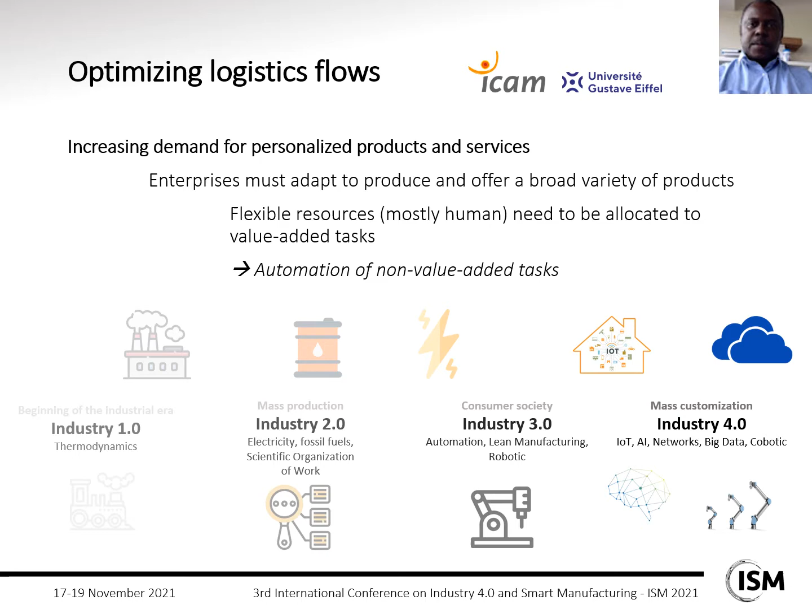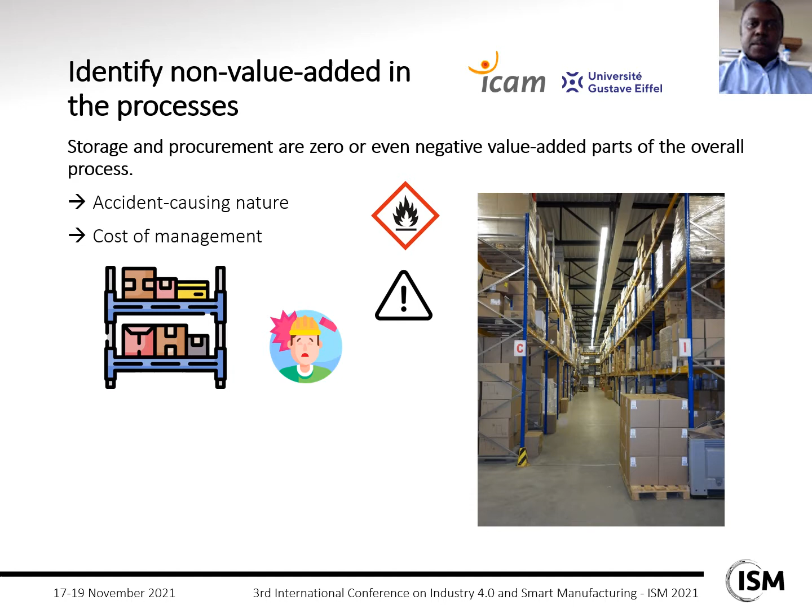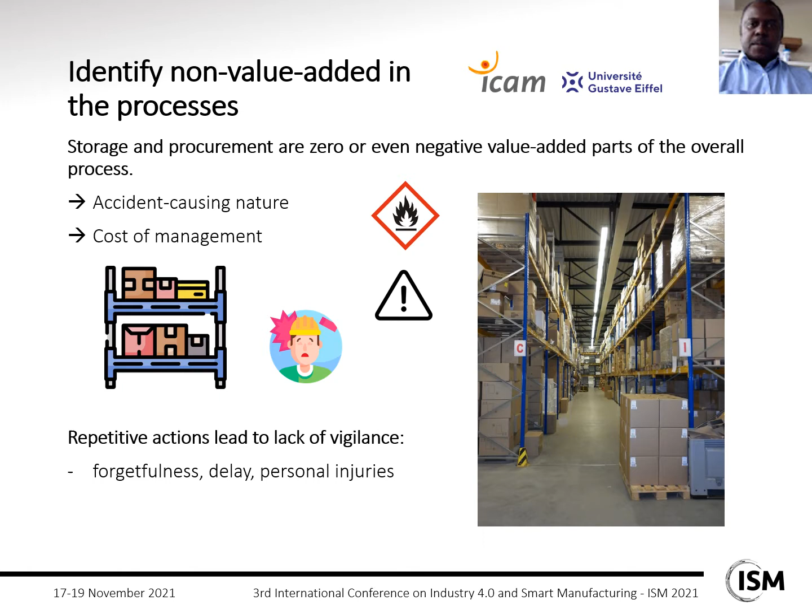First thing to notice is that storage and procurement are zero or even negative value-added parts of the overall manufacturing process. Because of its accident-causing nature, it often ends up with human accidents or losses that result in extra cost management and delays. Indeed, repetitive actions for operators in stock management processes lead to lack of vigilance, ultimately causing lots of waste that can be avoided.

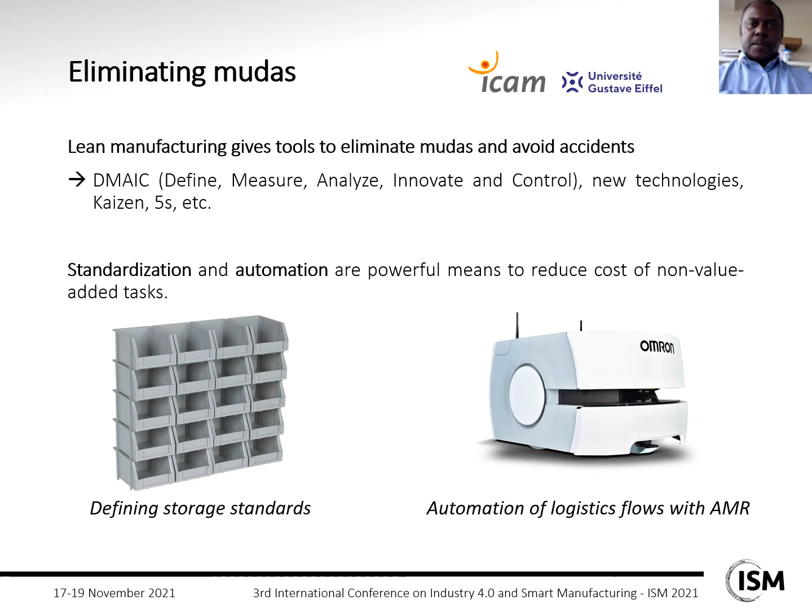Lean manufacturing thus gives us tools to eliminate those wastes and avoid accidents. For example, DMAIC, 5S or Plan-Do-Check-Act contribute to continuous improvement together with the implementation of new technologies. In particular, standardization and automation are powerful means to reduce the cost of non-value-added tasks through the definition of storage standards and the use of AMR for logistic flows.

This is, however, where SMEs usually meet brakes for the implementation of new technologies with smart manufacturing and Industry 4.0 concepts, considering the investments and the integration process within the organization.

This is why we developed a framework for optimizing industrial performance of SMEs based on lean manufacturing and GRAI methodology developed by the University of Bordeaux, together with DMAIC and design of experiments.

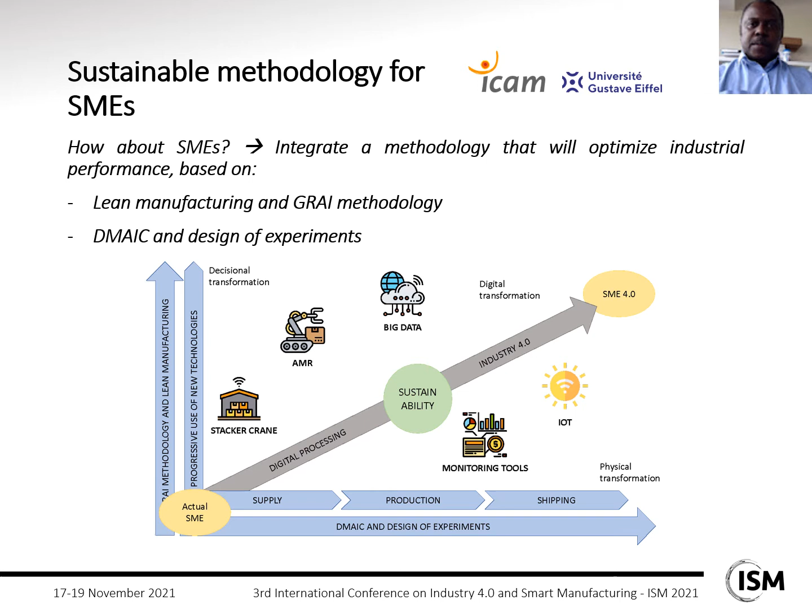The support strategy that we suggest consists of three steps. First, the evaluation of the current state of the company, then the definition of its desired future state, and finally the improvement of an ideal model of sustainability with feedback on the implementation of use cases in the company.

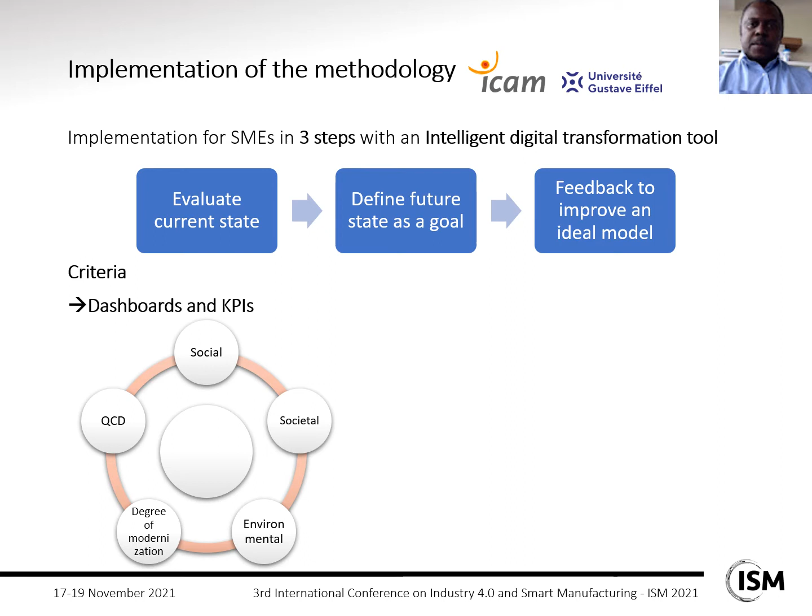Note that all the evaluation and definition is done in accordance with key performance indicators derived from quality, cost, delay, social, societal, environmental, and degree of modernization criteria.

In the end, the main hypothesis that we test with this framework is that placing humans at the center of implementation of Industry 4.0 concepts and smart manufacturing methods will increase industrial performance of SMEs.

For example, automating logistic flows with AMR and artificial intelligence within the workshop, while reducing stocks between workstations with an internal just-in-time strategy, also offers the opportunity for operators to work on really productive tasks and potentially reduce health risks as well.

On another level, IoT and big data can help optimize energy consumption of the company through predictive maintenance use cases. And also, augmented reality tools can be developed to assist operators in maintenance or stock management applications in order to reduce cognitive fatigue, while certifying quality of the processes and thus avoiding breakdowns and other wastes.

In this paper, we focused on the automation of non-value-added tasks related to storage, to test acceptability of new technologies such as AMR, with this framework among operators through use cases with an electronic card production company.

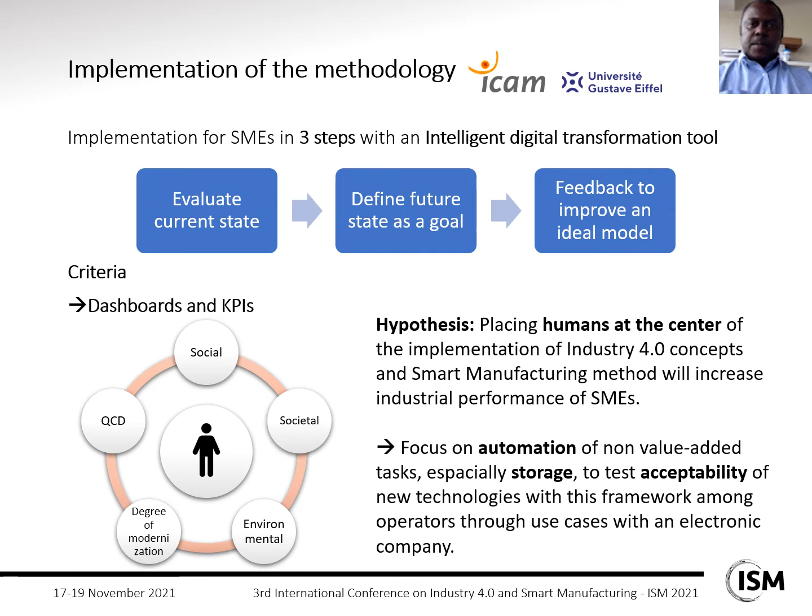Here in particular, the acceptability is supported by the development of a user-friendly human-machine interface for the MES. This aims to simplify management of logistic flows for operators with optimization and decision support modules based on artificial intelligence.

For instance, expert systems can be used to detect points to improve in a process. Machine learning and deep learning can then be used to predict future flows and need of procurement from big data.

In the end, the application should provide compiled data with relevant key performance indicators, so that users can allocate cognitive resources to really critical decisions.

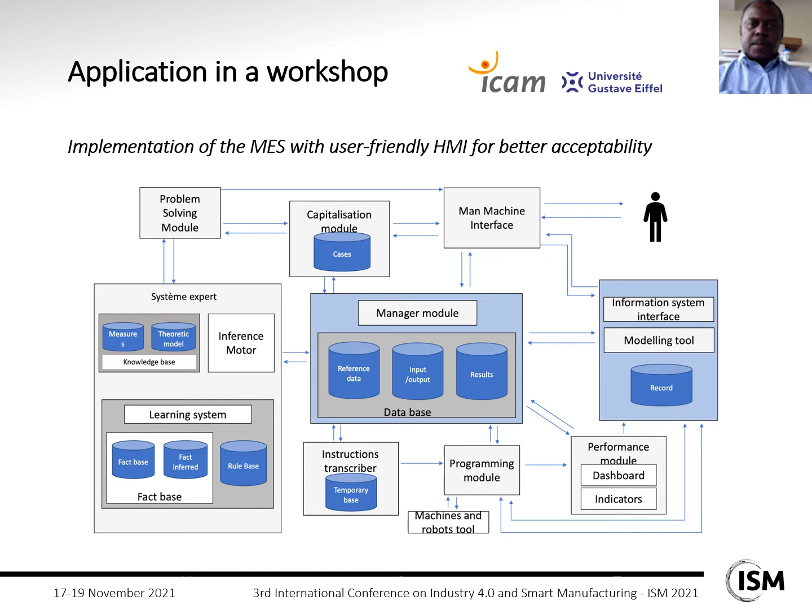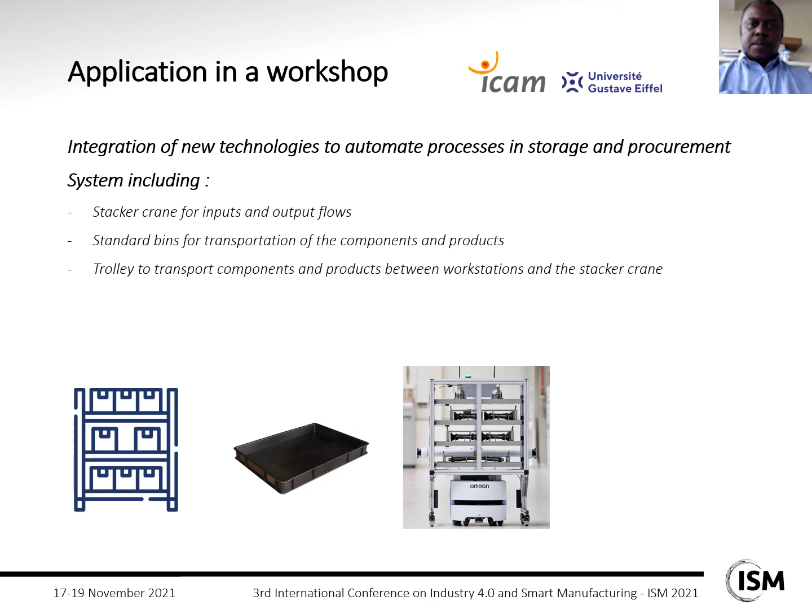In our case, the use case extends to the development of a stacker crane for input and output flows, standard bins for transportation of components and products, a trolley to transport components and products between workstations and the stacker crane, and finally an AMR fleet to transport the trolley and manage fabrication orders according to the MES directives.

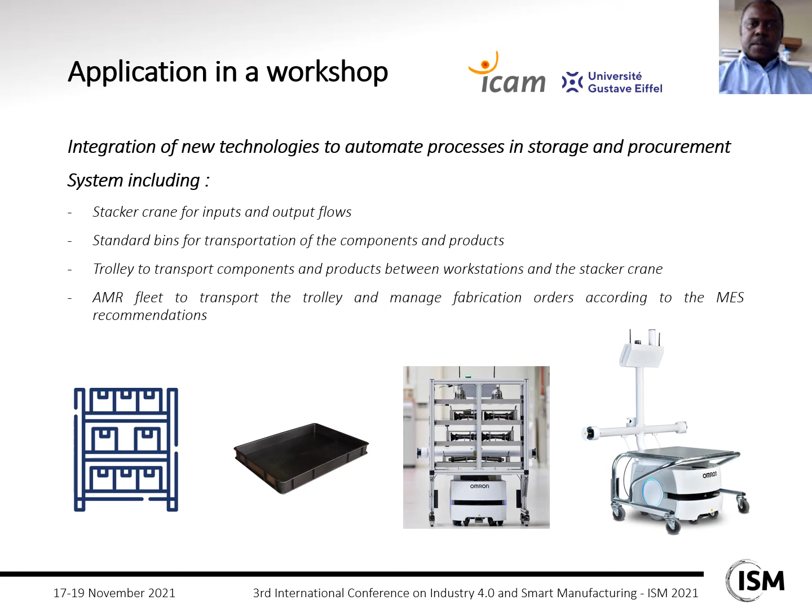This can derive to the layout as follows. First, an AMR can pick up the trolley filled with bins of components from the stacker crane, then transport it to the workstation depending on fabrication orders coming from the MES. Later, either an automated workstation or an operator will report the end of a process so that an AMR can

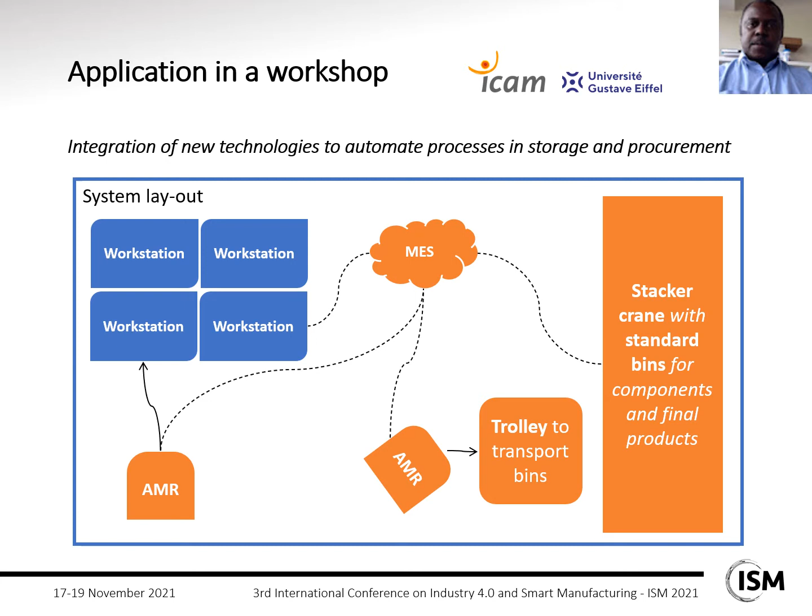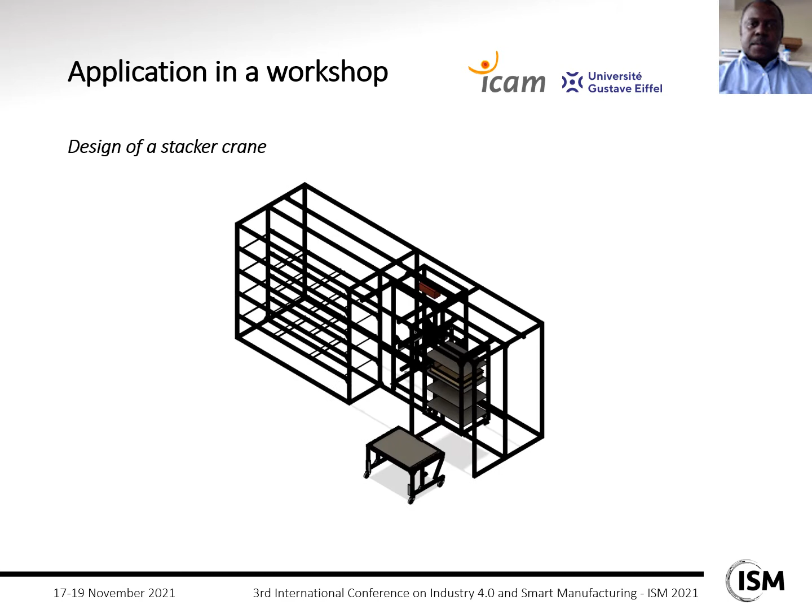come to pick up the final products and store them in the stacker crane. Here you can see the design we chose for the stacker crane. In particular, the use of rails on the upper part of the trolley allowed us to avoid the need for an input conveyor, thus gaining space for the bins of components and final products.

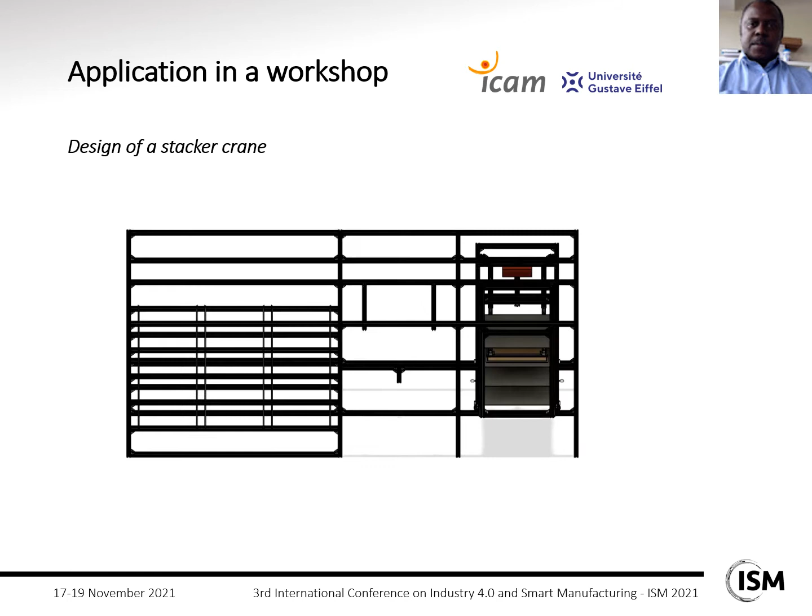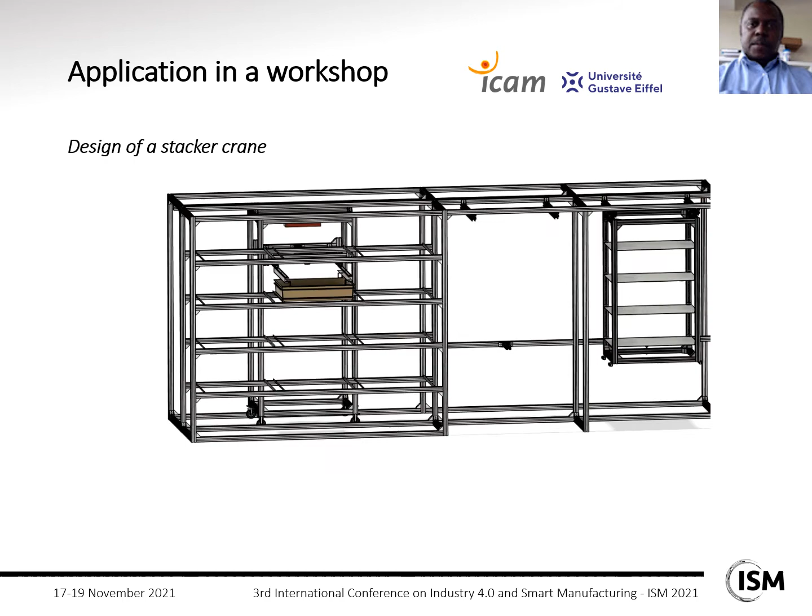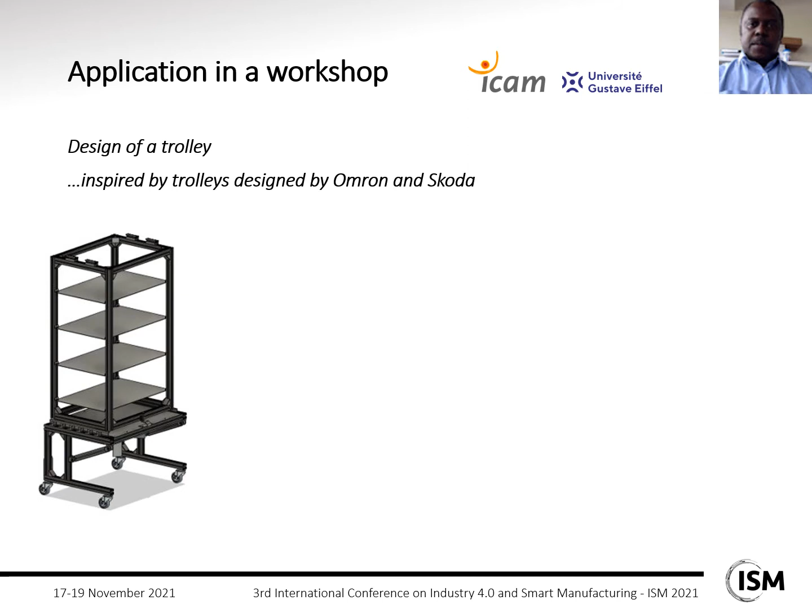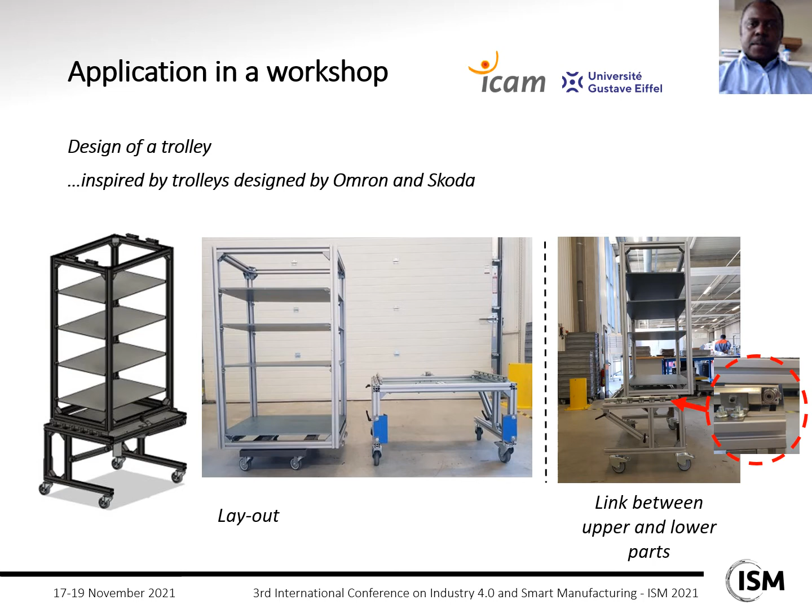About the trolley, the design is inspired by other systems developed by Omron or Skoda. However, we chose to separate the trolley into an upper and a lower part using another rail system, as you can see here, so that the AMR can simply drop the bins in the stacker crane with the upper part and then immediately go to carry out other tasks, for example with an operator, without having to wait for the storage process in the stacker crane to end.

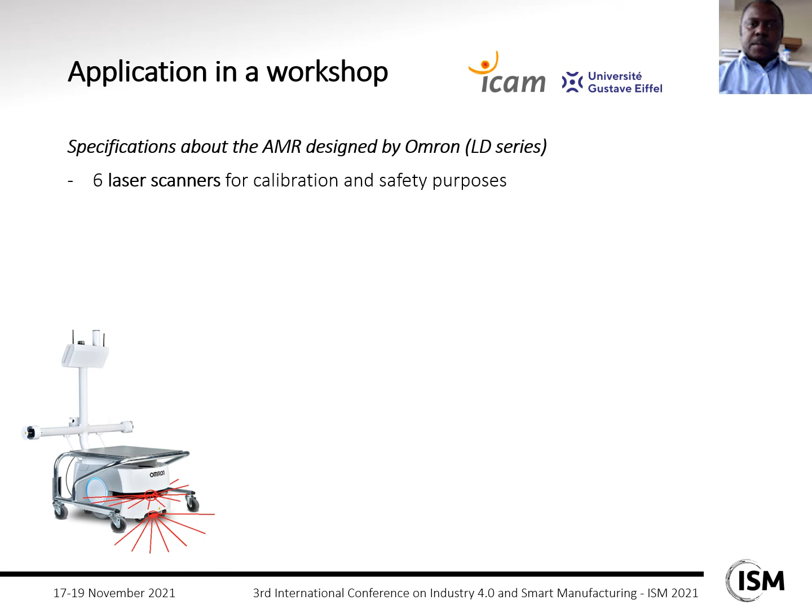The AMR itself benefits from 6 laser scanners. You can see here, and there, for example, for calibration and safety purposes. By the way, other subsystems such as a Hall effect sensor to detect presence of a trolley might be necessary to validate the gripping of the trolley.

Those constraints actually might have to be taken into account for the design of any other type of carts that need to be carried by similar robots. Finally, the AMR usually have several calibration methods. In this case, we have calibration by magnetic band and calibration by triangle detection.

Especially for stowage use cases, magnetic band offers the required precision to the 1/10 of a millimeter. However, this better applies for static workstations since the magnetic band has to be placed on the ground. For other use cases, the method with triangle detection can be used. In particular, this approach is very suitable for picking up a mobile trolley.

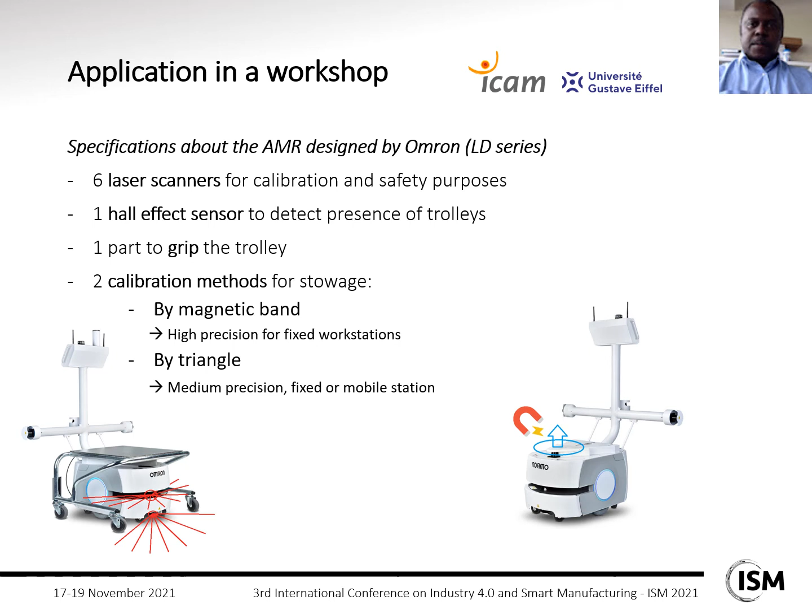Here you can see how the triangle detection method applies to the design of the trolley. In the end, this approach presents very low risk of failure, making it repeatable enough to ensure implementation in real conditions. However, it was observed that the quality of the ground surface influences the time it takes for the robot to pick up the cart.

Indeed, scratches and stains, as you can see here on the ground, can be interpreted as obstacles by the program. This issue might be faced as a break in the evaluation of the current state of the company. Thus, the emphasis should be on integration of the 5S method to overcome the problem.

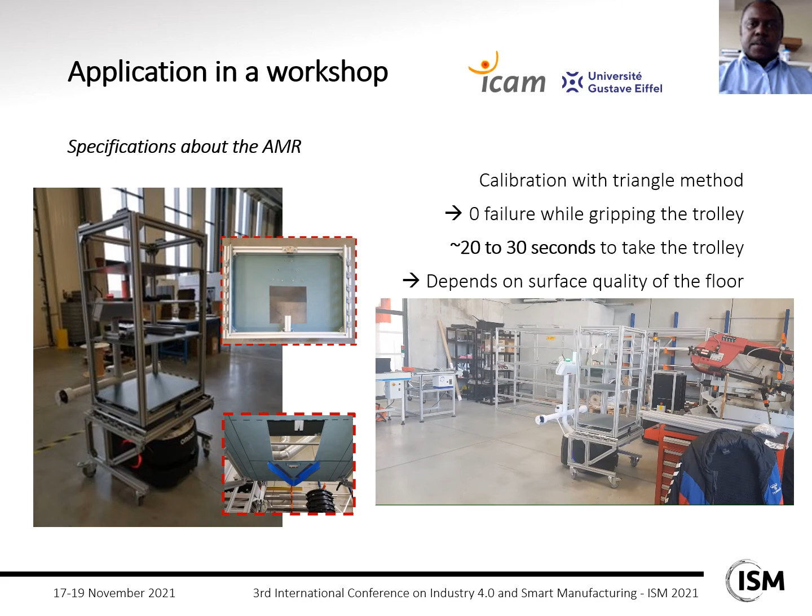Finally, we tested the stowage of the trolley in the stacker crane without the use of a magnetic band, which only gave us a success rate of 1 in 2 chances. Actually, this was later fixed still without magnetic bands, using a more flexible guiding approach. Indeed, with a one-side contact surface rail and the help of an electromagnet to ensure stability, we were able to improve repeatability of the process.

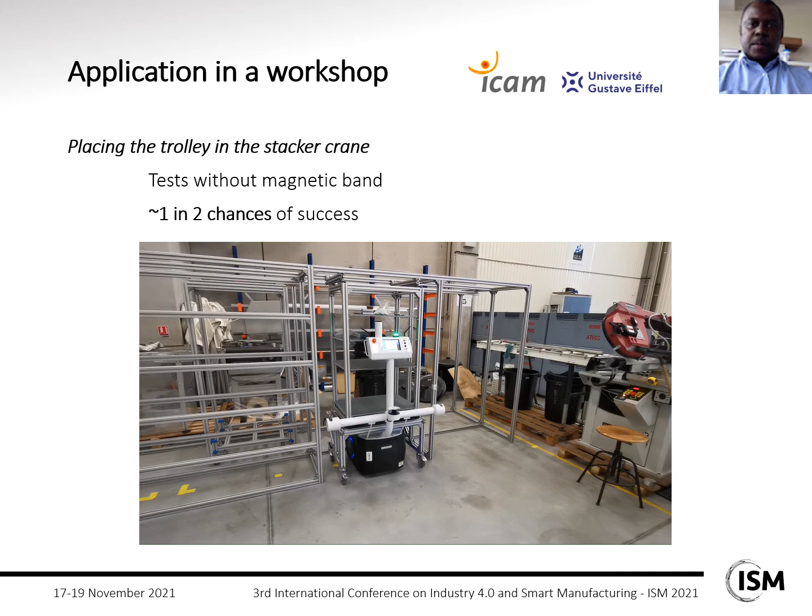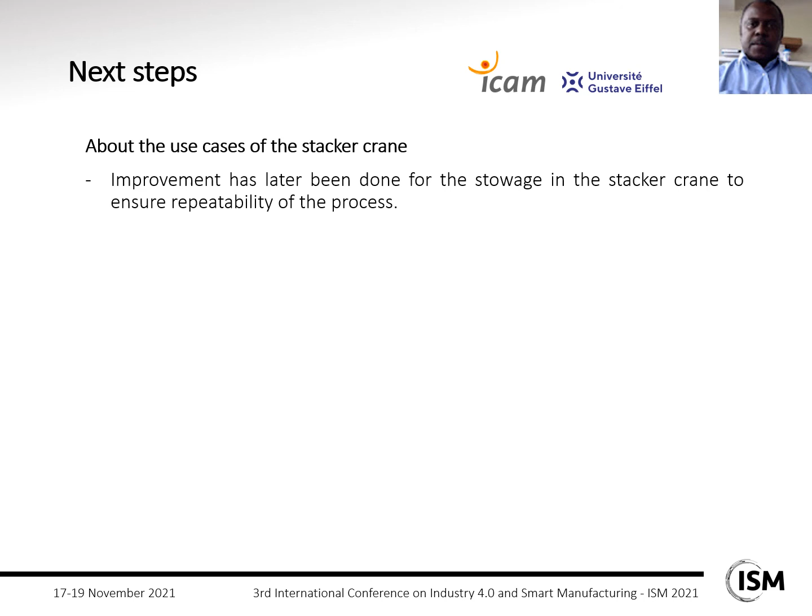Next steps about the use cases of the stacker crane include the improvement that we made and that has been tested for the stowage, which could ensure repeatability of the process. For the company, future state will be checked after implementation of the use cases to test hypotheses about the framework on storage and acceptability problems. Currently, they are working on their establishment on a new site that will integrate those use cases among others.

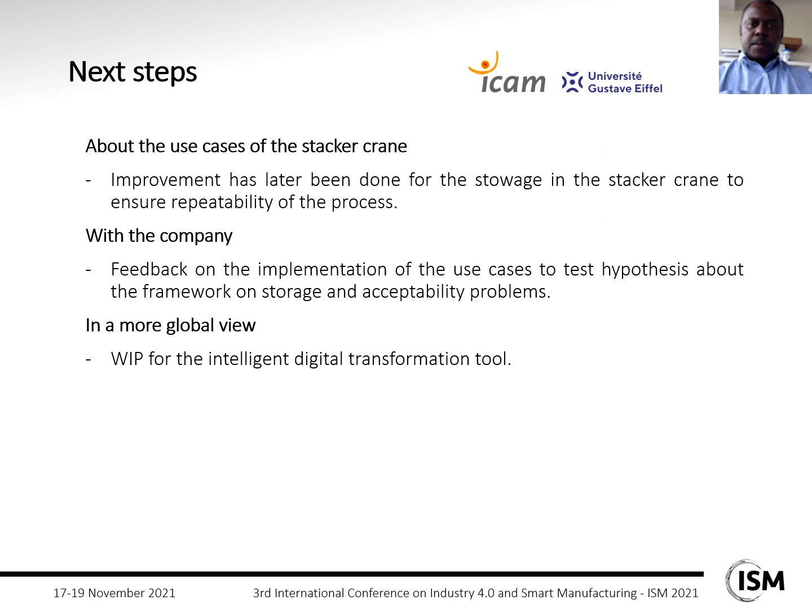Furthermore, in a more global view, development is still in progress for the Intelligent Digital Transformation tool. Also, a demonstrator in Industry 4.0 is being implemented at the icam Grand Paris Sud that will include production lines for electronic cards and small robots. This way, the demonstrator will implement Industry 4.0 concepts and the sustainable framework.